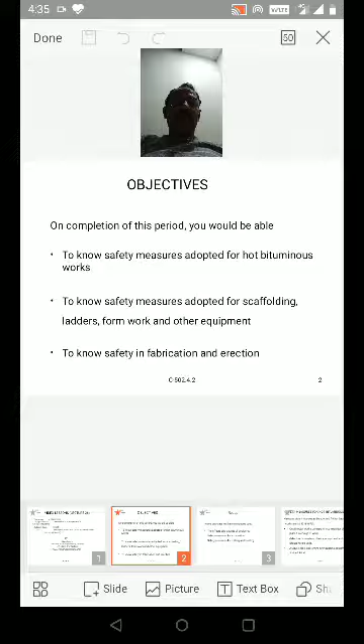Today we are going to discuss Construction Management and Entrepreneurship, from the subject Management of Resources in Construction Industry. Under this unit we are going to discuss the topics: to know safety measures adopted for hot bituminous works, to know safety measures adopted for scaffolding, ladders, formwork and other equipment, and to know safety in fabrication and erection.

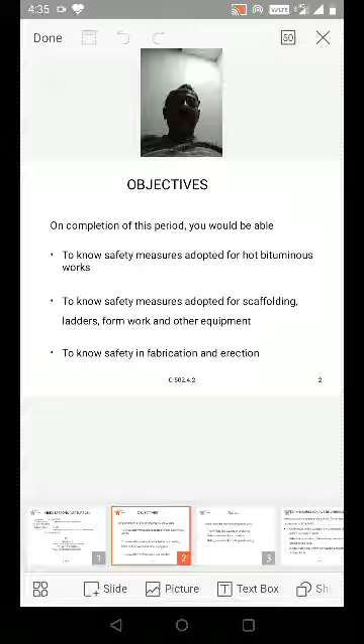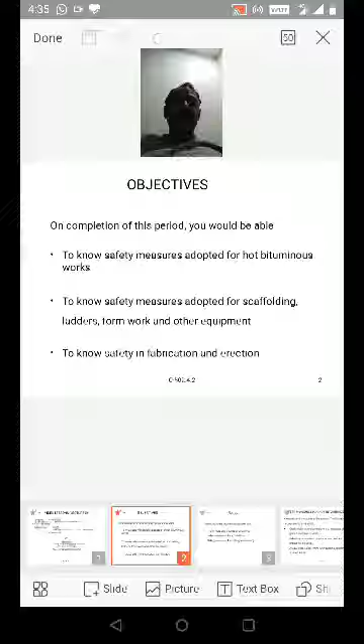That is today's topic objectives. On completion of this period, you would be able to know safety measures adopted for hot bituminous works, to know safety measures adopted for scaffolding, ladders, formwork and other equipment, and to know safety in fabrication and erection.

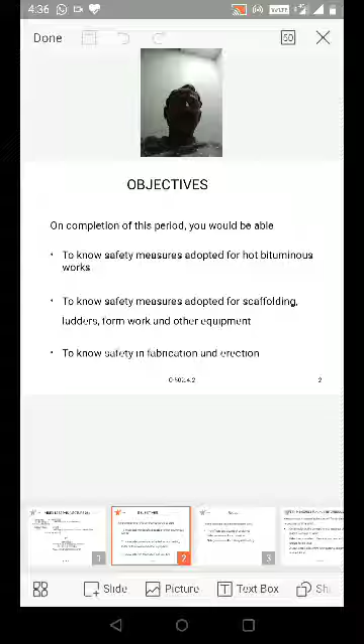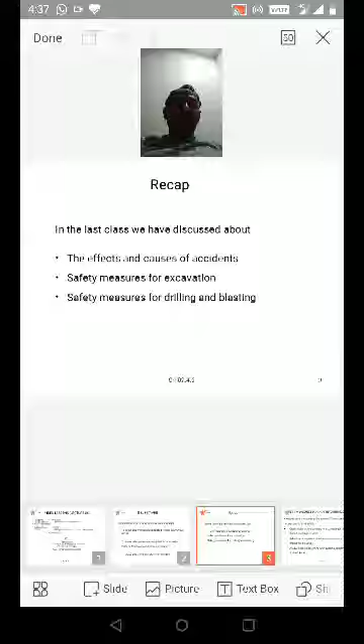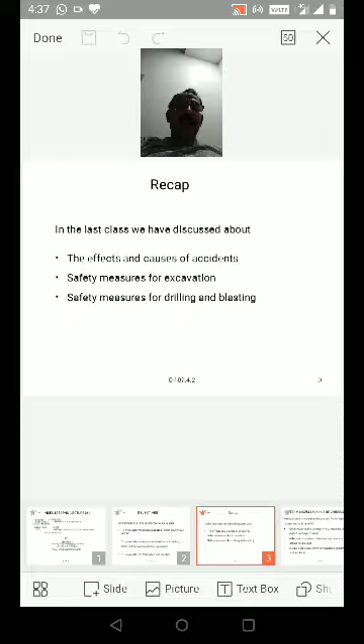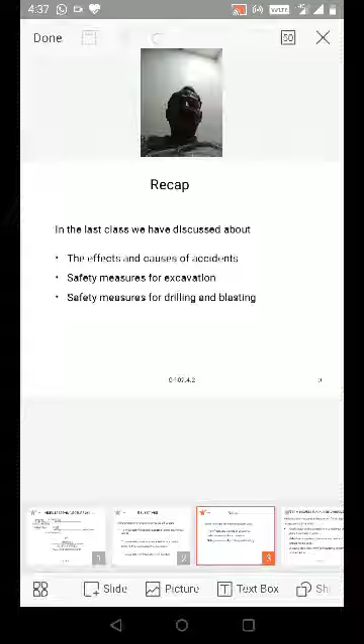Recap. In the last class we have discussed about the effects and causes of accidents, safety measures for excavation, and safety measures for drilling and blasting. We discussed all these three in the previous class, that is the 25th lecture class.

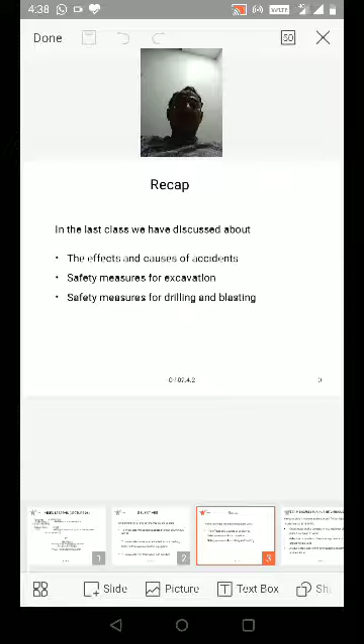Now we are going to discuss safety measures adopted for hot bituminous works, safety measures adopted for scaffolding, ladders, formwork and other equipment, and safety in fabrication and erection.

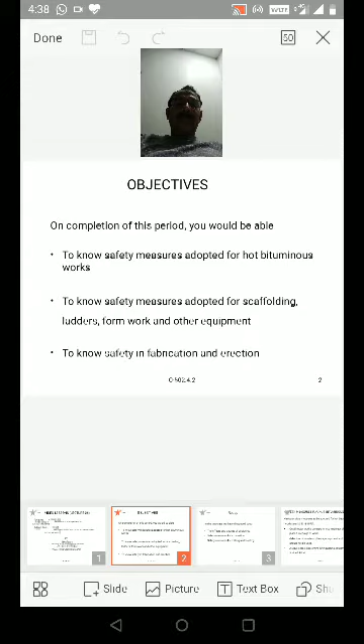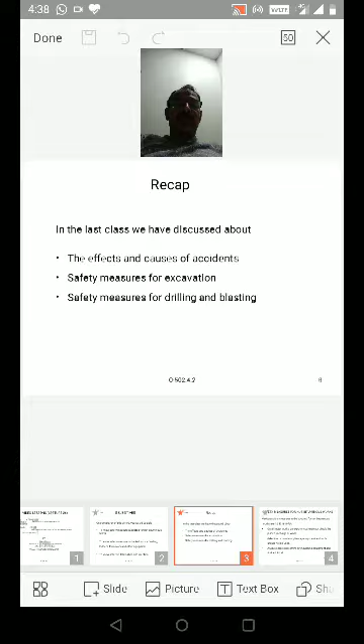First one, safety measures adopted for hot bituminous works. Various safety measures to be adopted for hot bituminous works are as per IS 5916 1970.

On all major works, an experienced engineer should be placed in charge of work.

Defective or unsafe appliance, equipment and tools should not be used.

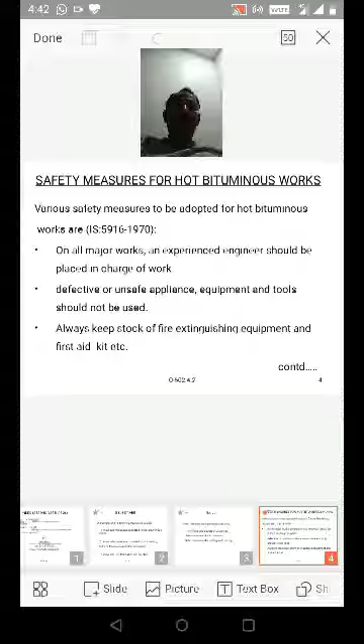Continuation of safety measures for hot bituminous works: workers engaged on jobs involving handling of hot bitumen should use protective wears such as boots, gloves, goggles and helmets.

In these safety measures, workers engaged on that job, who are involved in and handling hot bituminous works, should use protective wears.

What are those protective wears? Protective wears such as boots, gloves, goggles and helmets - boots for foot safety, gloves for hand safety, goggles for eye safety, and helmets for head safety. So you have to protect your hands, your hair, your legs, your eyes and head.

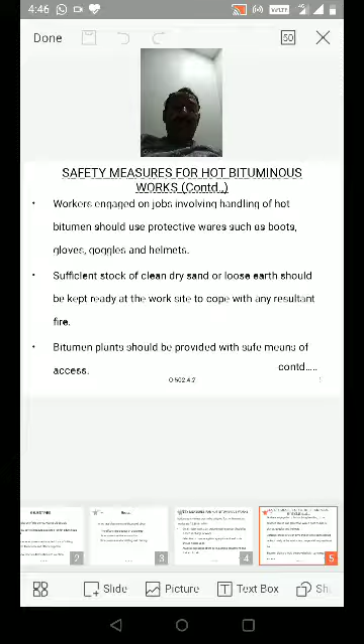Continuation, safety measures for hot bituminous works. Working platforms in bitumen plants should be provided with handrails. Pulleys, belts and drive machine mechanisms should be protected by suitable guards.

Compressors, electrical installations and other equipment should be adequately protected from weather, mechanical damage and dust particles. This is also very, very important. So you have to protect all these things.

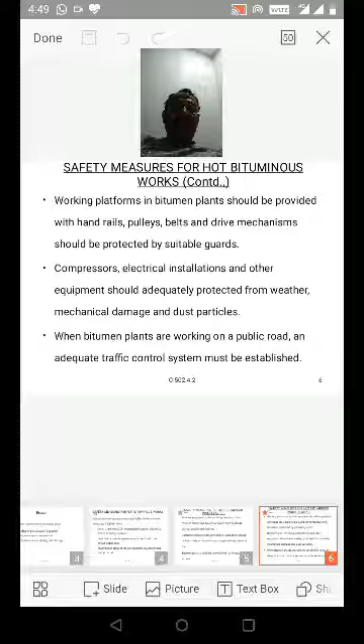When bitumen plants are working on a public road, an adequate traffic control system must be established. This is also important.

Safety measures for scaffolding, ladders, formwork and other equipment were completed up to here for hot bitumen. Now, safety measures for scaffolding, ladders, formwork and other equipment as per IS 3696 1966.

Every scaffold should be firmly supported and properly strutted or braced to ensure stability.

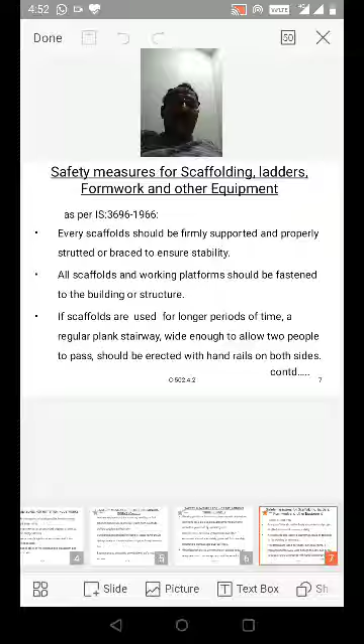If scaffolds are used for longer periods of time, a regular plank stairway wide enough to allow two people to pass should be erected with handrails on both sides.

Safety measures for scaffolding, ladders, formwork and other equipment as per IS 3696 1966. Every scaffold should be firmly supported and properly strutted or braced to ensure stability. All scaffolds and working platforms should be fastened to the building or structure. If scaffolds are used for longer periods of time, a regular plank stairway wide enough to allow two people to pass should be erected with handrails on both sides.

In continuation, safety measures for scaffolding, ladders, formwork and other equipment. A protective overhead covering should be provided for the men working on the scaffolds, 3 meters above the scaffold platform, and should be made of planks.

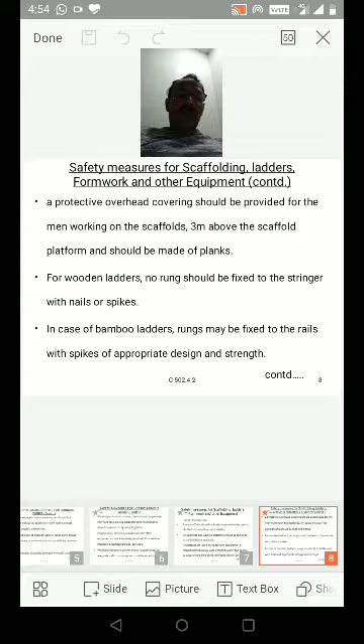For wooden ladders, no rung should be fixed to the stringer with nails or spikes. In case of bamboo ladders, rungs may be fixed to the rails with spikes of appropriate design and strength.

For wooden ladders, no rung should be fixed to the stringer with nails or spikes. In case of bamboo ladders, rungs may be fixed to the rails with spikes of appropriate design and strength.

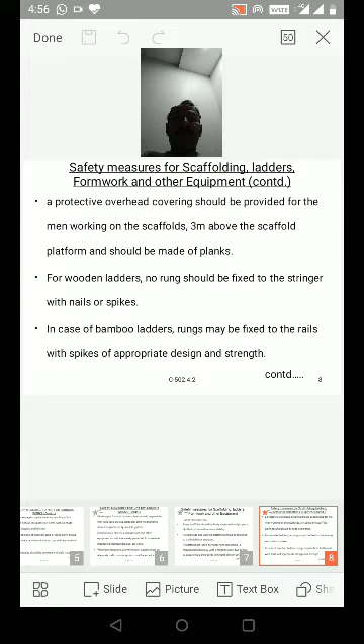Continuation, safety measures for scaffolding, ladders, formwork and other equipment. Ladders employed in heavier trades should not exceed 6 meters in length. For lighter trades, ladders should not exceed 8 meters in length.

During dismantling of scaffolds, necessary precautions should be taken to prevent injury to persons due to fall of loose materials, bracings and other parts of scaffolds. While erection of scaffolds, we also have to take precautions. While dismantling, loose material, bracings and other parts of scaffolds may fall down, so care must be taken to avoid injury.

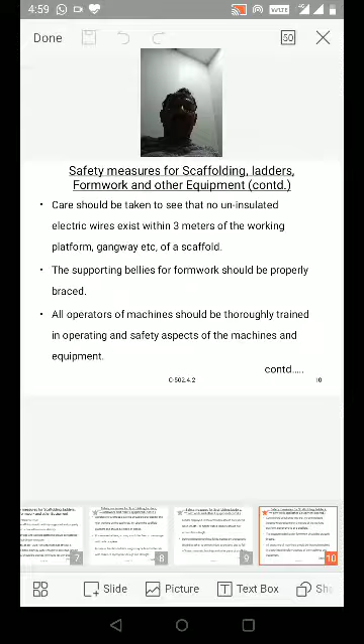Safety measures of scaffolds, ladders, formwork and other equipment. Care should be taken to see that no uninsulated electric wires exist within 3 meters of the working platform, gangway, etc. of a scaffold.

The supporting bellies for formwork should be properly braced.

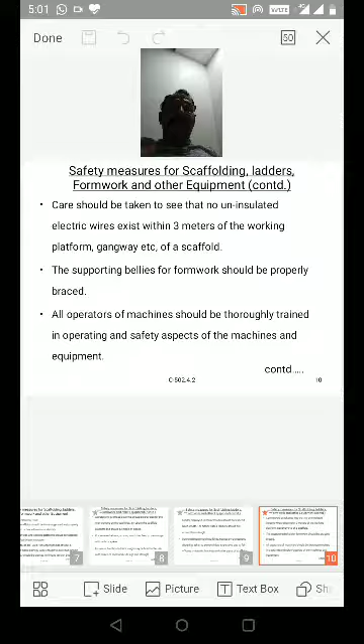All operators of machines should be thoroughly trained in operating and safety aspects of the machines and equipment. So, these are the safety measures of scaffolds, ladders, formwork and other equipment.

In continuation with previous points, safety in terms of both main and auxiliary equipment should be considered at all construction sites. So at the equipment, main and auxiliary equipment, as well as human beings, you have to take safety into account at all construction sites.

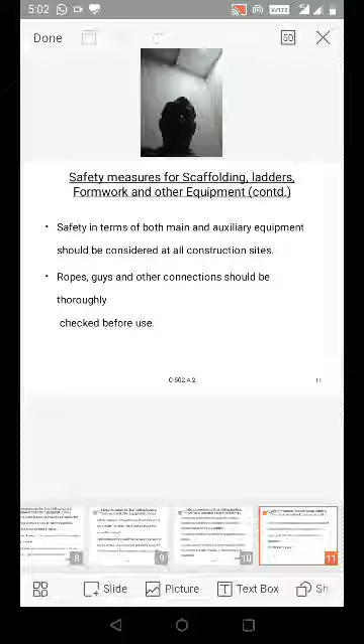Ropes, guys and other connections should be thoroughly checked before use. So these are the safety measures you have to take for scaffolding, ladders, formwork and other equipment, both while erection as well as dismantling. In both cases you have to take the safety measures.

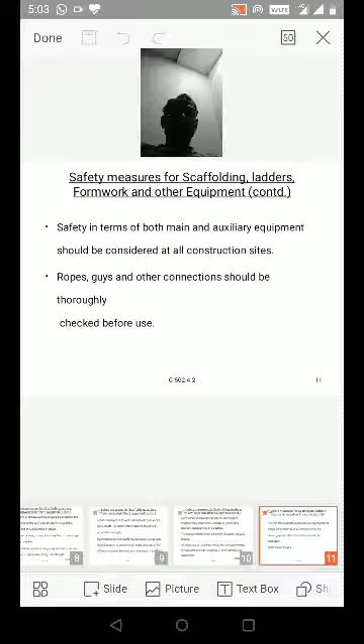Safety in fabrication and erection. The following safety measures should be adopted during fabrication and erection.

All equipment such as gas cutting and welding sets, drills, power hacksaws, girders, etc. should be checked periodically to ensure their safe working. So before use, all these things you have to check.

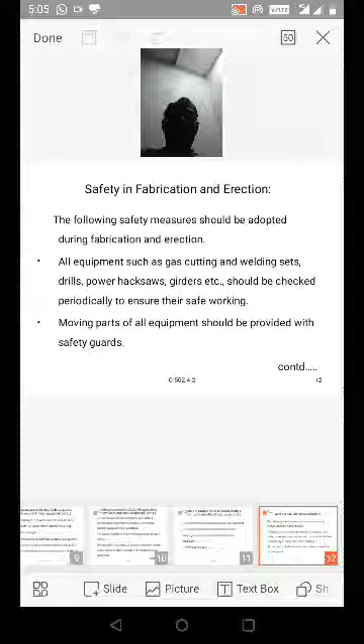These are the important points regarding safety in fabrication and erection. The following safety measures should be adopted: all equipment such as gas cutting and welding sets, drills, power hacksaws, girders, etc. should be checked periodically to ensure their safe working, and moving parts of all equipment should be provided with safety guards.

In continuation, safety in fabrication and erection: rubber pipe lines for oxygen and acetylene gas should be regularly checked for leakage or damage. Leakage of gas from regulators, pipelines or connections with the gas torch should be rectified immediately.

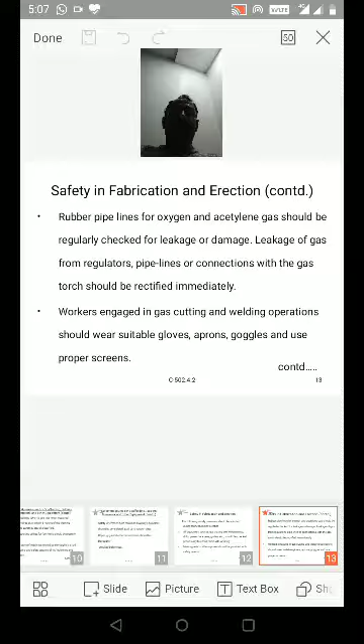Workers engaged in gas cutting and welding operations should wear suitable gloves, aprons, goggles and shoes, and use proper screens. These are very important points while taking safety in fabrication and erection.

Continuation of safety in fabrication and erection. Power cables for all equipment should be properly insulated and protected from damage and cuts. Cut pieces and scrap should be stored at an appropriate place to avoid accidents. All lifting tools and tackles such as wire ropes, U-clamps, shackles, chain pulley blocks, hooks, etc. should be checked thoroughly before undertaking erection work.

These are also important points regarding safety in fabrication and erection. Power cables for all equipment should be properly insulated and protected from damage and cuts. Cut pieces and scrap should be stored at an appropriate place to avoid accidents. All lifting tools and tackles such as wire ropes, U-clamps, shackles, chain pulley blocks, hooks, etc. should be checked thoroughly before undertaking erection work.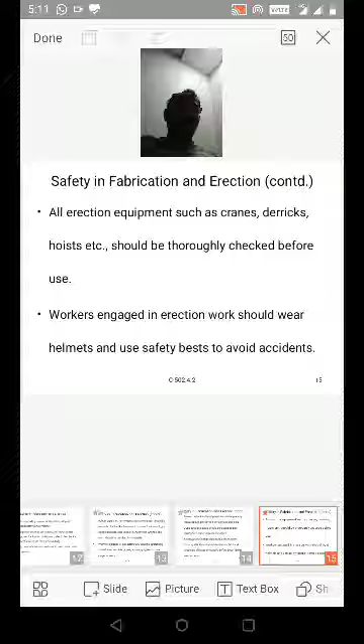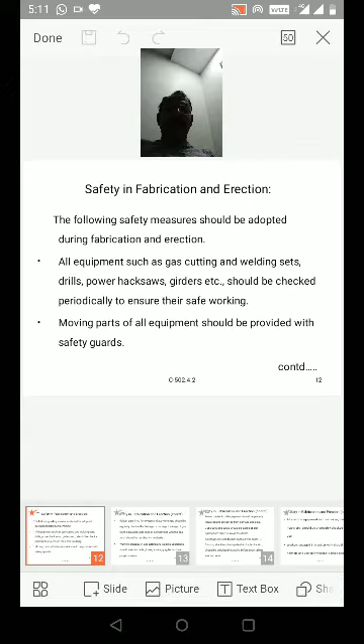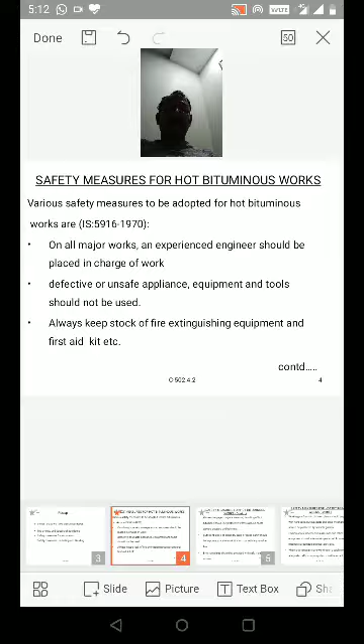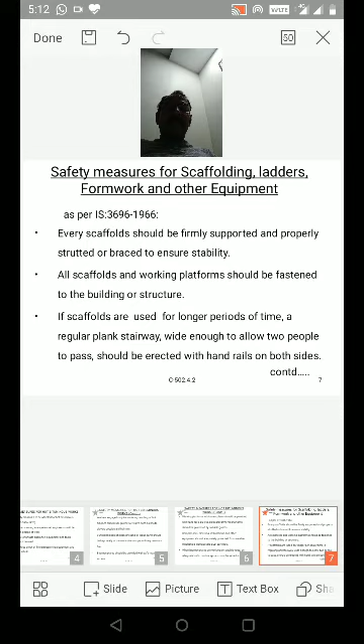Summary. In this class we have discussed safety measures adopted for hot bituminous works, safety measures for scaffolding, ladders, formwork and other equipment, and safety in fabrication and erection.

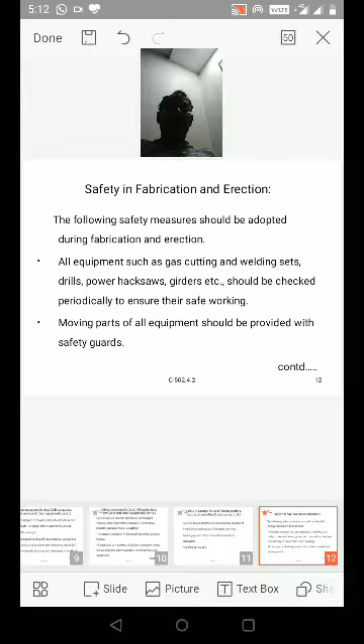So we have discussed very elaborately regarding this in the 26th lecture class. We have discussed safety measures adopted for hot bituminous works, safety measures adopted for scaffolding, ladders, formwork and other equipment, and safety in fabrication and erection. These three points we have discussed in this class.

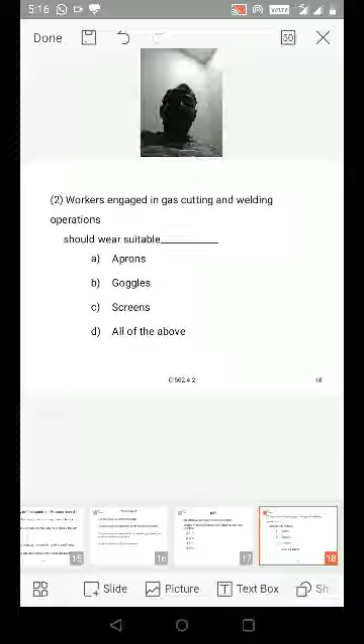Quiz number 2. Workers engaged in gas cutting and welding operations should wear suitable dash. A, aprons; B, goggles; C, screens; D, all of the above. All of the above means aprons, goggles and screens, these three.

Quiz number 2. Workers engaged in gas cutting and welding operations should wear suitable dash. A, aprons; B, goggles; C, screens; D, all of the above.

So quiz number 1: no uninsulated electric wire exists within dash meters of the working platform, gangway, etc. of a scaffold. A, 5 meter; B, 10 meter; C, 3 meter; D, 20 meter. In the case of quiz number 2, workers engaged in gas cutting and welding operations should wear suitable dash. A, aprons; B, goggles; C, screens; D, all of the above.